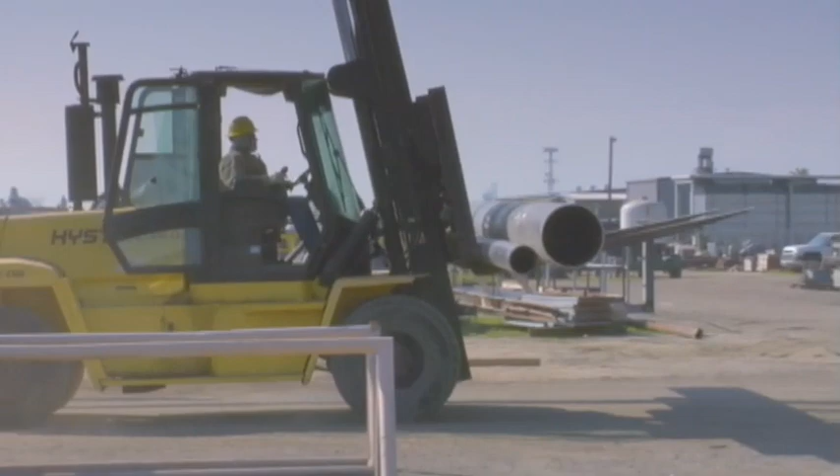This video is an overview of our safety expectations. We'll spend the next 30 minutes reviewing the critical safety issues that affect your work every day.

Let's start with the basics, your safety responsibilities. First, you must follow your company's safe work practices. Second, read the Contractor Safety Handbook provided by the producer. The handbook is your guide to safety expectations while working on our property. Keep it handy so that you can refer to it whenever you have questions.

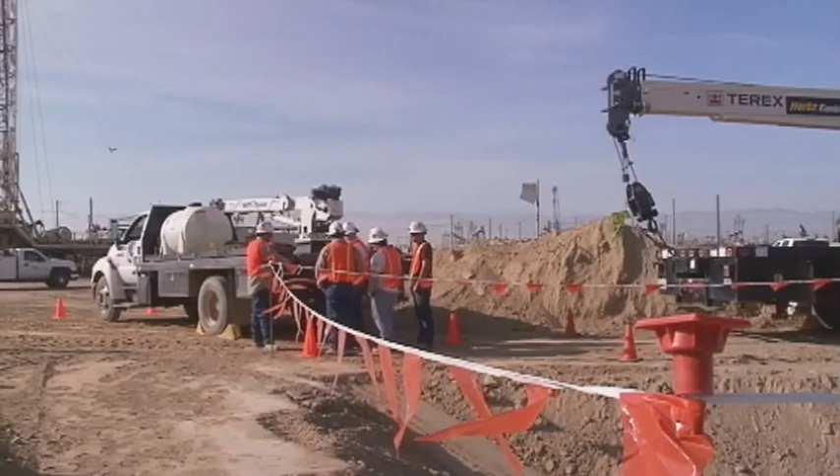We have developed this video to help you identify some of the hazards you might face on the job. Your company will give you details and training about the specific hazards at your job site. Hazard recognition and participating in safety tailgate meetings is important for you and your coworkers' safety.

Finally, some work areas will have additional requirements. Your company may have safety rules that are more strict than those of the oil producers. Check with your supervisor. You should recognize on-site safety rules cannot cover every possible situation. You still need to use your own good judgment.

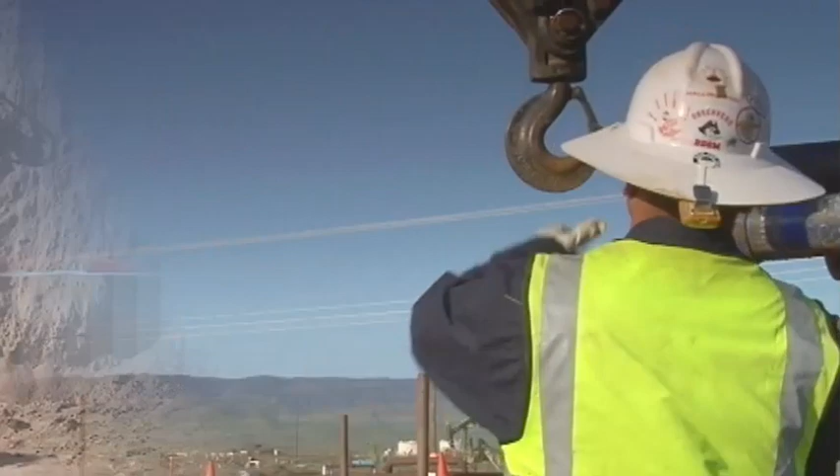As you begin your job, see that you wear proper clothing and the right personal protective equipment for your job. Stop any work that's not being done safely. You have the authority and the duty to stop unsafe work. Then correct the problem or safeguard the condition and report it to your supervisor.

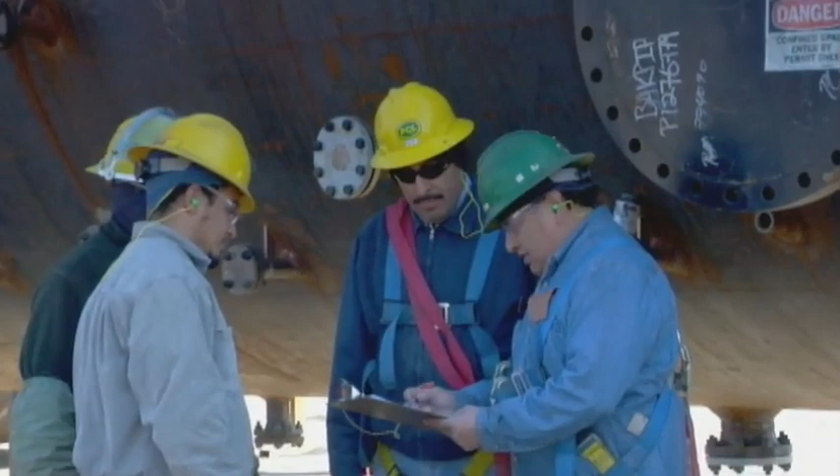All work must be planned. Your supervisor is responsible for planning work, but you must know and follow the plan. This planning includes emergencies and your responsibility to respond quickly in the event an incident or injury occurs.

Your company must provide you and your coworkers with a safety orientation and job-specific training. Your company must also provide the right tools and personal protective equipment in good working order. Supervisors must know and follow all safety policies. They must notify the producer of incidents immediately, investigate all accidents, and then submit a report to the producer.

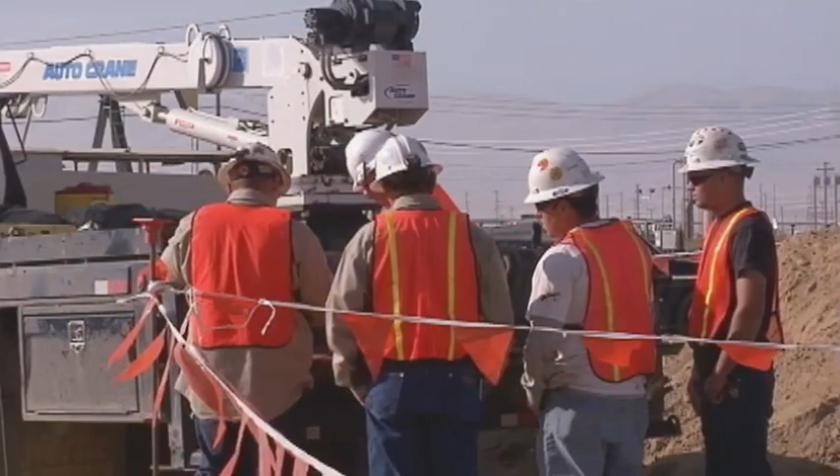Personal protective equipment, hydrogen sulfide, H2S, and respiratory protection. Now let's discuss the importance of personal protective equipment. Everyone who works at our locations must use basic personal protective equipment. We require everyone on the job site, including visitors, to wear an approved hard hat.

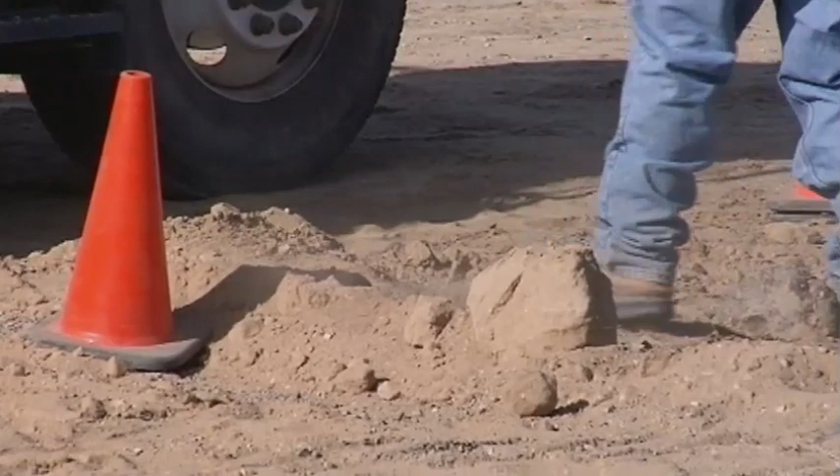Most producers require hard-toed safety footwear. Many producers require that everyone wear safety glasses with side shields or acceptable wraparound safety glasses. Some producers require snake chaps to be worn in certain situations. Gloves must be used when the job requires it.

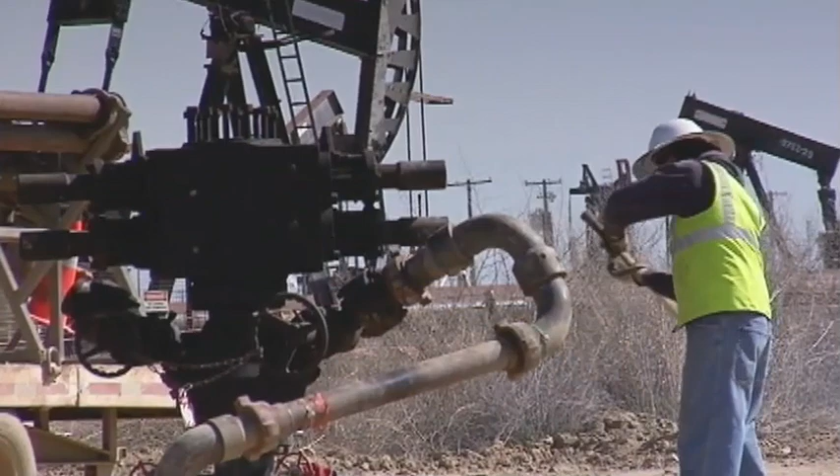You must wear proper work clothing, including long pants and a shirt with sleeves. Never wear loose or torn clothing or sleeveless shirts. Some producers do not allow hooded shirts or sweatshirts to be worn. Most producers require fire-resistant clothing, FRC, to be worn.

Consult with your supervisor with questions regarding this requirement. If your clothes get soaked with oil or any other substance that could catch fire or irritate your skin, change the clothes as soon as possible. Some producers may have prohibitions regarding wearing rings or other jewelry while working on their properties. Please check with the producer you are working for regarding specific prohibitions or requirements.

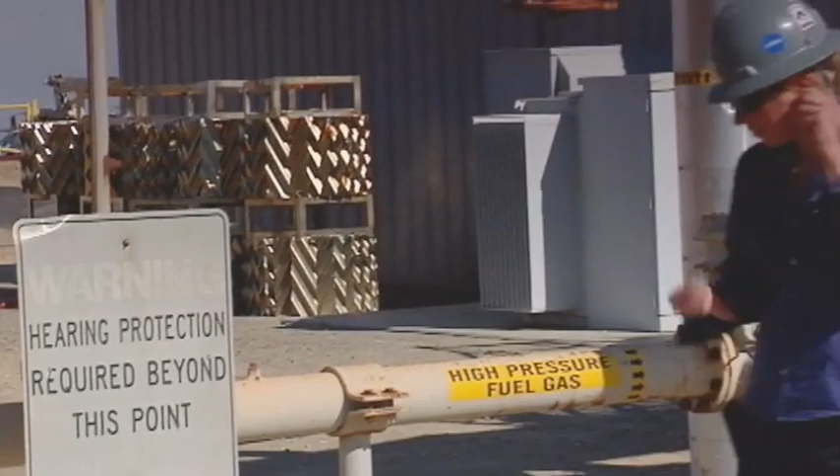Safety goggles and a plastic face shield must be worn when grinding, chipping, sawing, drilling, or hammering on metal. Chemical goggles must be worn anytime a splashing hazard exists. Approved hearing protection must be worn by all personnel working in or near posted areas or if the job task requires it. Different jobs require specific safety equipment.

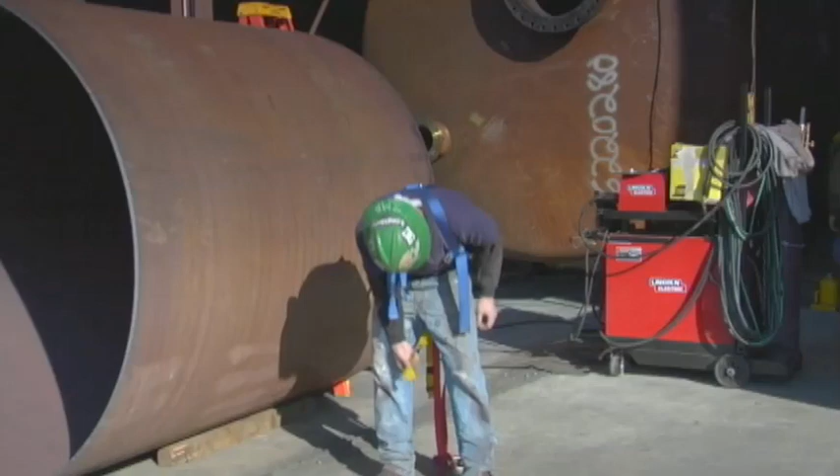For example, safety harnesses and lanyards must be worn by employees working at unprotected heights above the ground. Many locations produce crude oil and gas containing hydrogen sulfide, H2S, or sour gas. Hydrogen sulfide is poisonous and can be lethal in low concentrations.

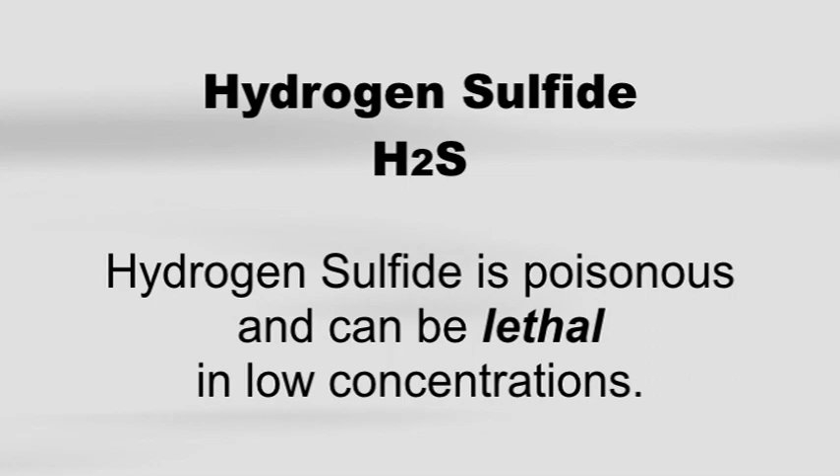All contract personnel working around production equipment, including well work and drilling operations that handle crude oil containing H2S, must be trained in H2S safety. Your company is responsible for providing you with appropriate respiratory protection and required training.

Many areas require the use of personal H2S monitors. You must be trained by your company in the operation of monitors. At a minimum, personal H2S monitors must alarm at 10 parts per million.

If your monitor alarms, move quickly crosswind, uphill, and away from the source. When working in a possible H2S environment, stay upwind of the potential source and plan a route of escape. Wind indicators are provided around equipment handling H2S and at rig locations.

Never attempt to rescue an H2S victim unless you have a backup person available and have donned SCBA. Communication is a critical part of any safety program.

Let's look at 3 important elements: the oil producer's safe work practices, the safe work permit, and energy control or lockout, tagout, blockout procedures. Safe work practices are a set of requirements that everyone must follow when working on our properties. A key section of safe work practices are the basic work rules.

Everyone must follow these rules at all times. Let's review these basic rules. Always act with safety in mind, both your own and your coworkers. Plan each job properly. Identify and address known hazards. Do not start the work unless you can do it safely. Stop or pause any unsafe job or operation.

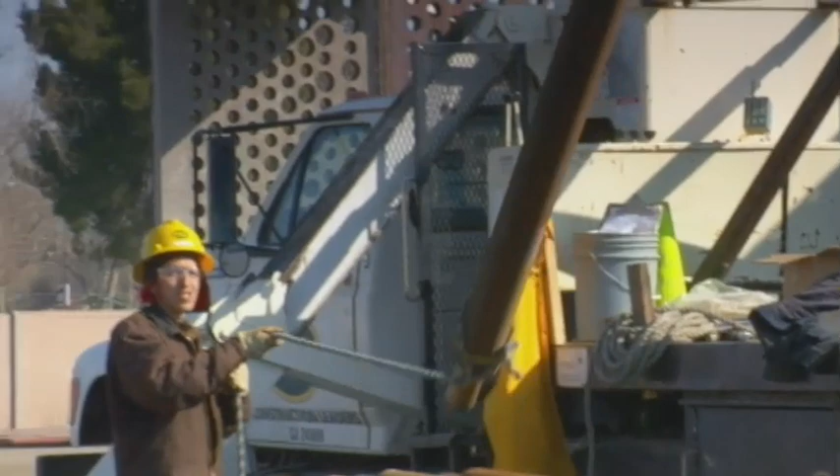Some areas in California can experience high daytime temperatures during work hours. Under these conditions, heat stress can be a serious danger and cause long-term illness or death. While working in these conditions, ensure that you and those around you drink plenty of water. Use good judgment during tasks that require strong physical exertion. If you feel too hot or experience dizziness or other symptoms, rest in the shade and carefully monitor your symptoms.

Seek medical help immediately if signs of heat exhaustion are manifest, such as hot, dry skin, profuse sweating, confusion or dizziness, nausea, or shallow breathing.

Do not work unless you are fit for duty. Do not work unless you are properly trained for the job. Do not take part in fighting, scuffling, horseplay, or any other activity that could injure someone. Comply with all posted warning signs. Wear required protective equipment. Use and maintain tools and equipment safely.

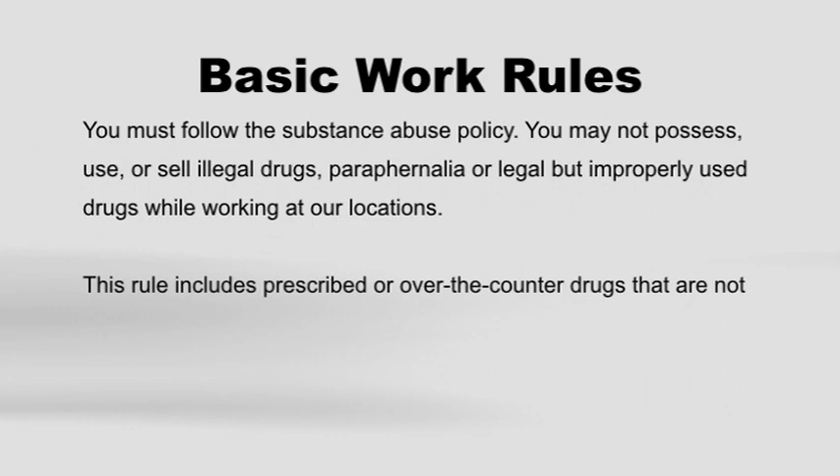Operate vehicles safely. You must follow the substance abuse policy. You may not possess, use, or sell illegal drugs, paraphernalia, or legal but improperly used drugs while working at our locations. This rule includes prescribed or over-the-counter drugs that are not used for the intended purpose.

Do not report or return to work when impaired by alcohol. You may not possess or use alcoholic beverages on our properties. You may not carry or use firearms, weapons, fireworks, explosives, live ammunition, or devices that will start fires. Do not remove, damage, or interfere with any safety device or warning sign. Smoke only in designated areas.

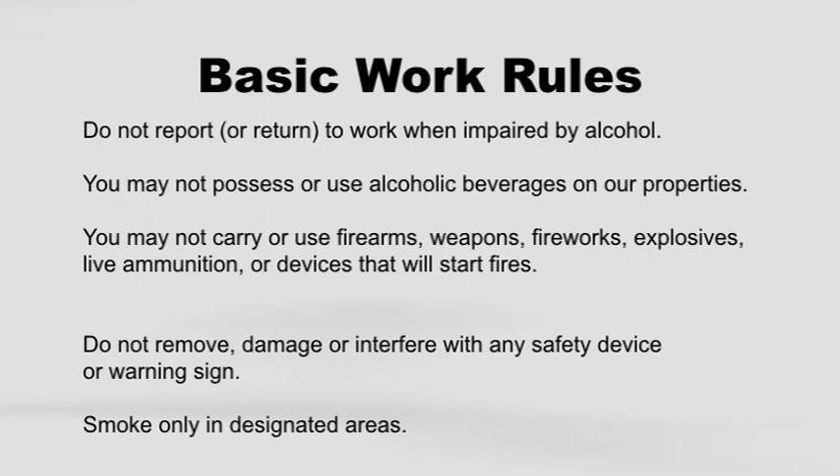Report all safety incidents to your supervisor right away. This includes personal injuries, equipment damage, and spills. Do not steal, damage, destroy, or remove any property belonging to the oil producers or its employees, contractors, or visitors. Make sure you have a means to call for help when working in isolated areas.

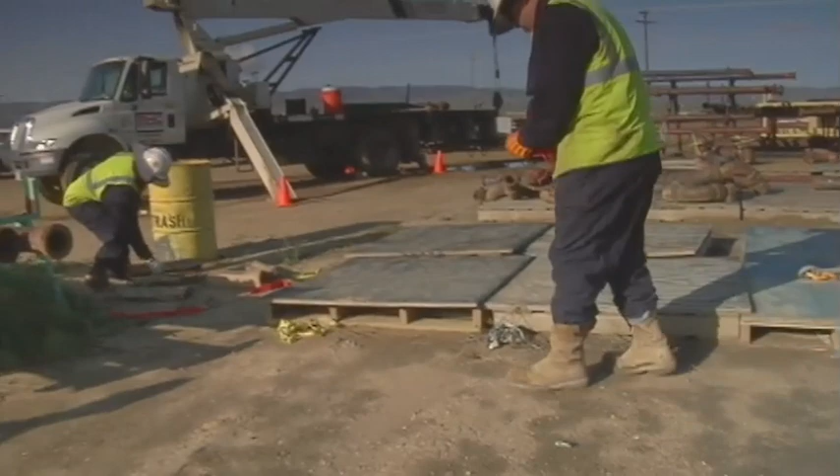Housekeeping rules are an important part of safe work practices. Always keep your work area clean and orderly. Make sure emergency exits are clear. Clean up mud, oil, grease, and litter right away. And make sure to collect trash and debris at least once a day.

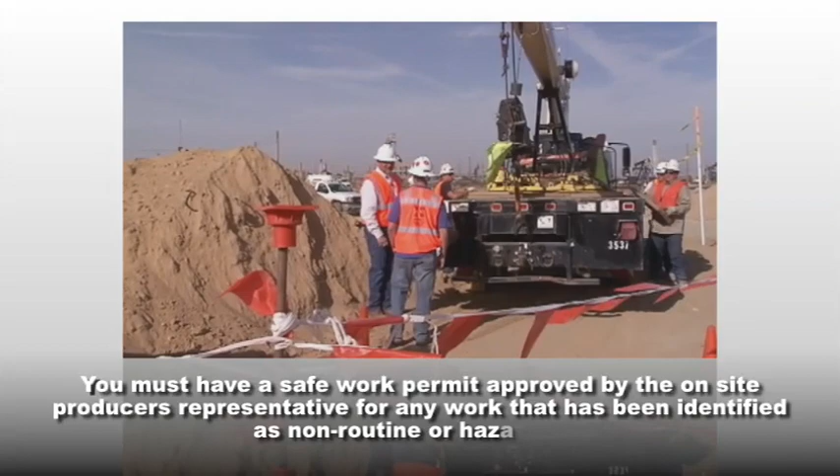You must have a safe work permit approved by the on-site producer's representative for any work that has been identified as non-routine or hazardous. Your supervisor will ask everyone involved to review the permit and then post it at the job site. Make sure you understand all the permit requirements before starting the job. Stop work if conditions change, a new hazard occurs, or an oil producer representative asks you to stop.

Now, let's review some critical hazardous exposures that can be encountered while working on the oil producer's property. Hazardous stored energy. Energy control is required whenever you are performing tasks which involve equipment, machines, piping, or vessels which could potentially injure you due to a release of stored energy. Energy sources must be identified and isolated to a zero energy state before service and maintenance can be performed.

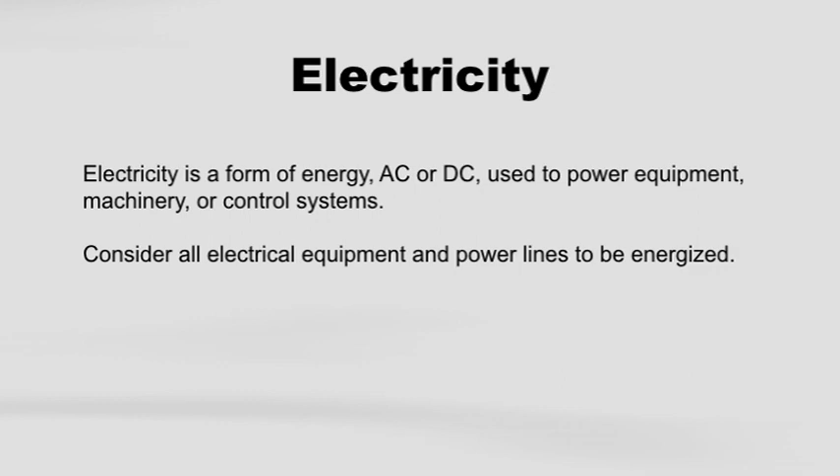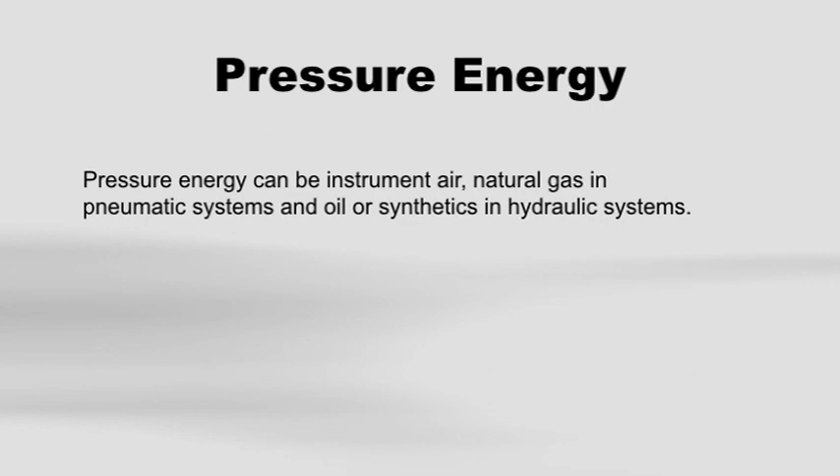Electricity is a form of energy, AC or DC, used to power equipment, machinery, or control systems. Consider all electrical equipment and power lines to be energized. Pressure energy can be instrument air, natural gas in pneumatic systems, and oil or synthetics in hydraulic systems.

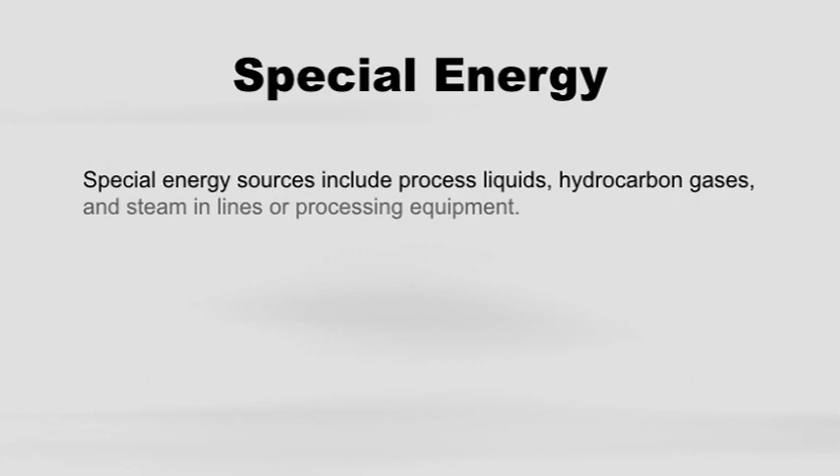Momentum gravity energy is the force in moving equipment components caused by gravity or inertia. It is critical to identify momentum energy after the power source has been shut off. Residual energy can occur after the power source has been shut off or disconnected. Special energy sources include process liquids, hydrocarbon gases, and steam in lines or processing equipment.

Methods of energy isolation. The following are ways to isolate energy sources. Positive physical isolation. Remove spool, air gapping. Blind flanges, slip blinds, double block and bleed, and lockout of energy source.

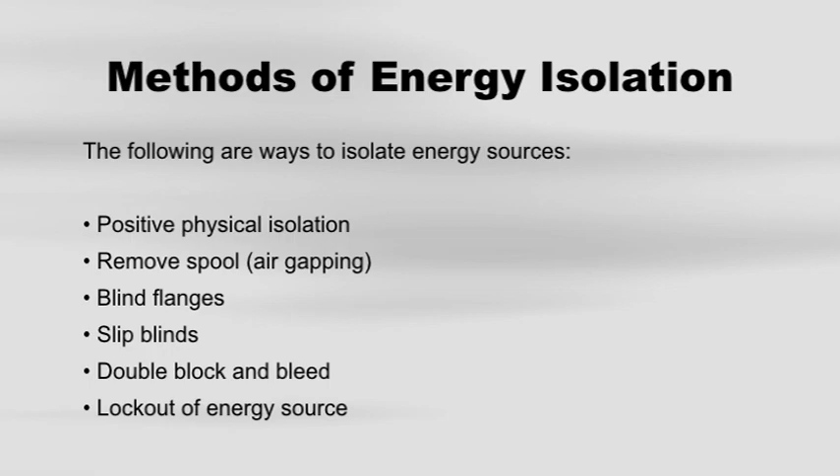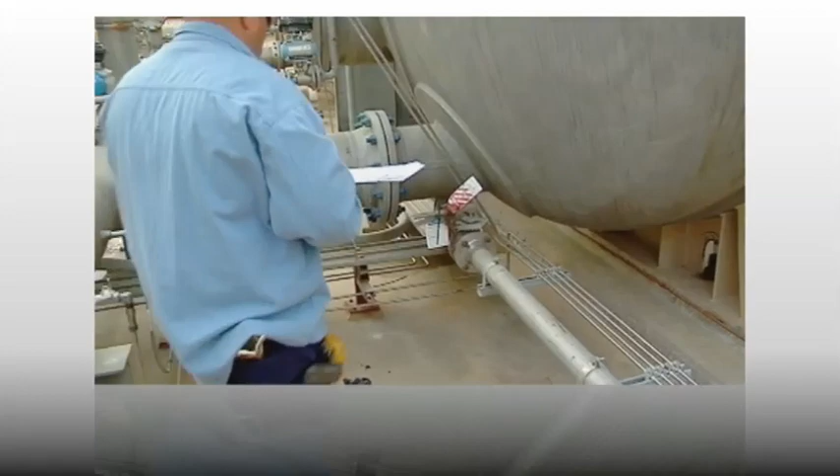Locks must be used with tags to isolate energy sources. Tags should indicate the person responsible for the lockout, the reason for the lockout, the job being performed, and the date. Each producer has developed equipment lockout, tagout, blockout procedures.

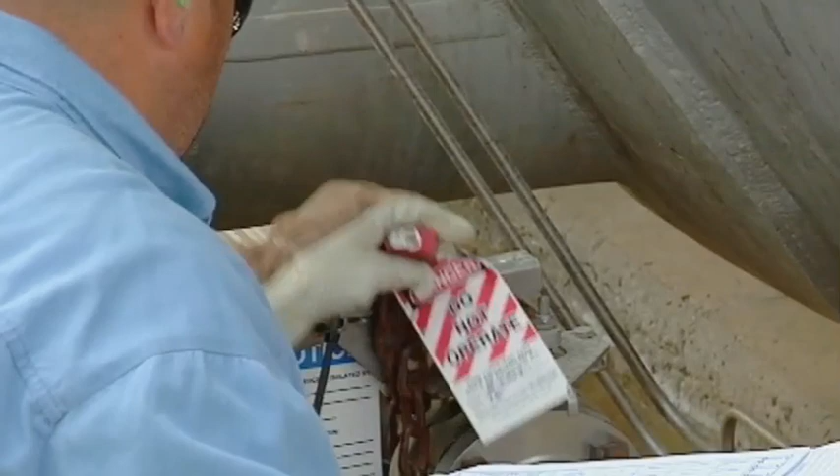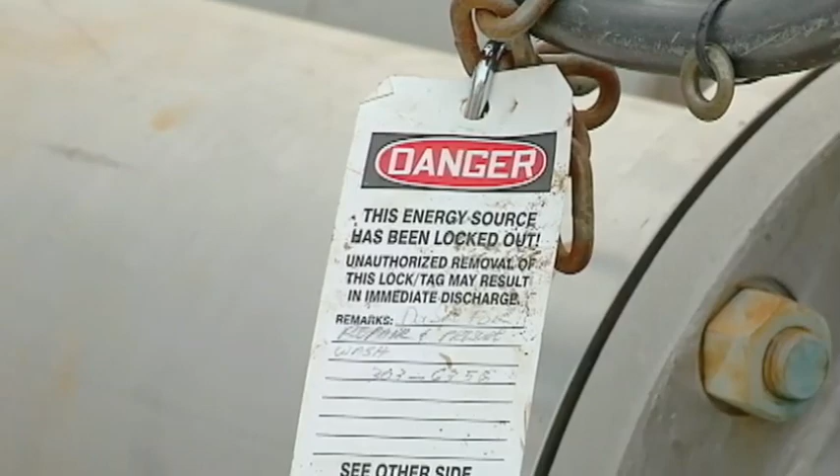Contractors must understand these requirements and assess how their own procedures will work in conjunction with the producers. Never shut down or start up equipment or open or close valves until you notify the producer's representative or have been directed to do so by the producer's representative.

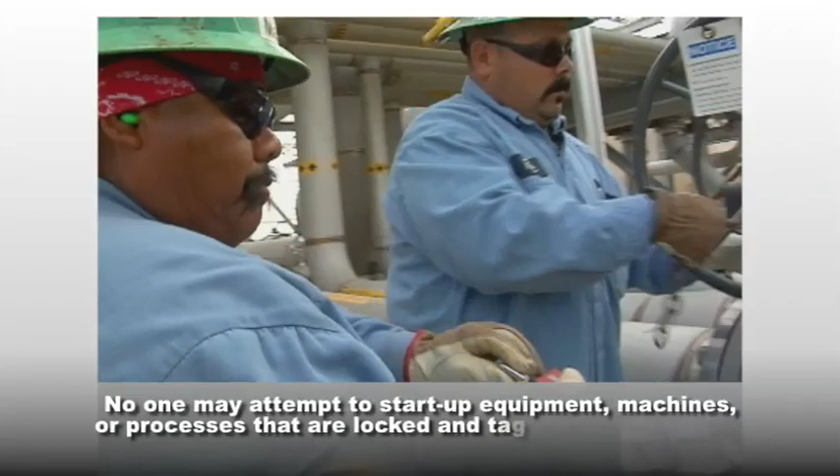Group locks can be used to isolate equipment for a group of workers. Lockout must provide the same level of protection as utilizing individual locks. No one may attempt to start up equipment, machines, or processes that are locked and tagged out of service. Specific procedures must be followed to restart, re-energize, or activate equipment or systems that have been isolated.

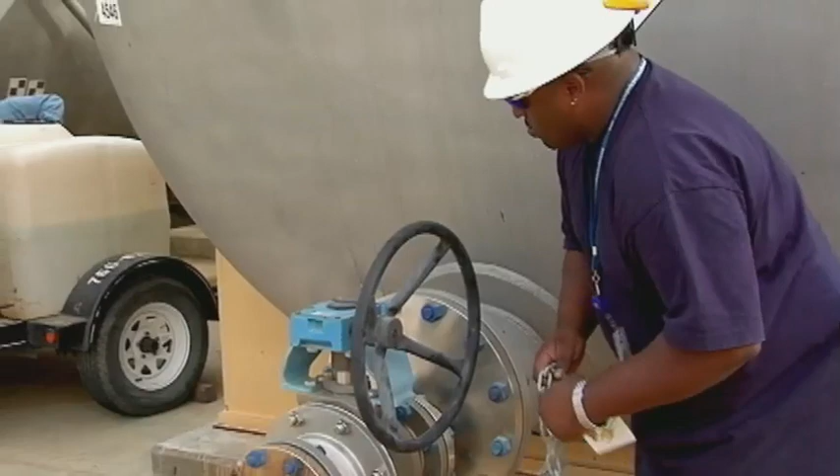The basic requirements which must be followed before isolation devices can be removed and equipment can be energized are: First, notify affected employees that the isolation devices are being removed. Second, check to ensure that all personnel are clear of the equipment or system to be re-energized. Third, locks used to isolate equipment can only be removed by the person who originally applied the lock.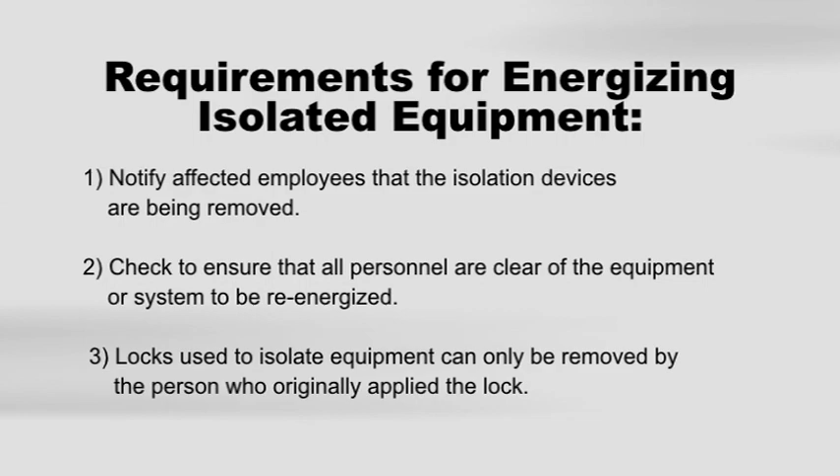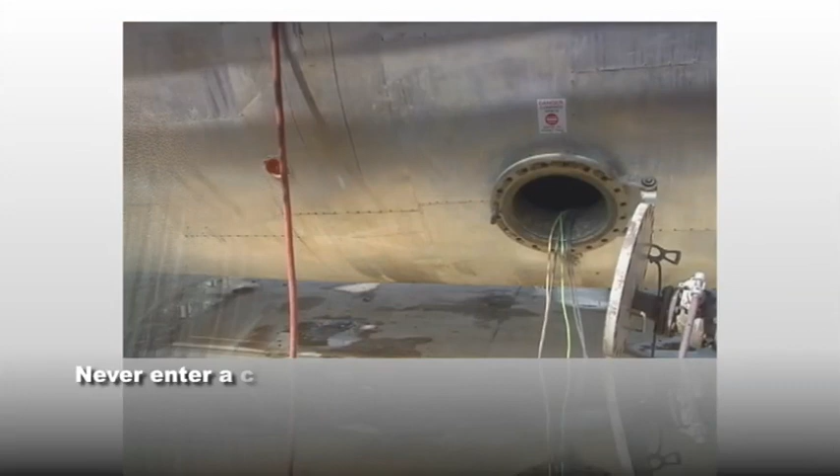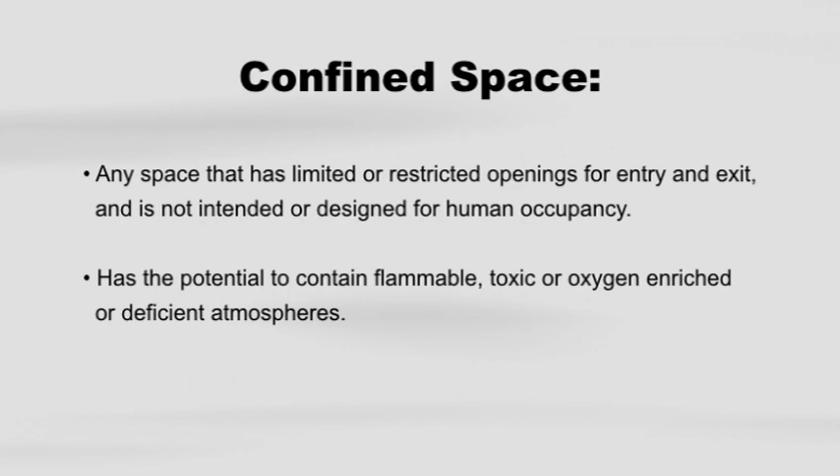Confined spaces. Confined space entry permits are required any time confined spaces are entered. Never enter a confined space unless you have received the appropriate training, have the right equipment, and have been tasked with work in that area. A confined space is any space that has limited or restricted openings for entry and exit and is not intended or designed for human occupancy, has the potential to contain flammable, toxic, or oxygen-enriched or deficient atmospheres, or contains any other recognized serious safety or health hazard.

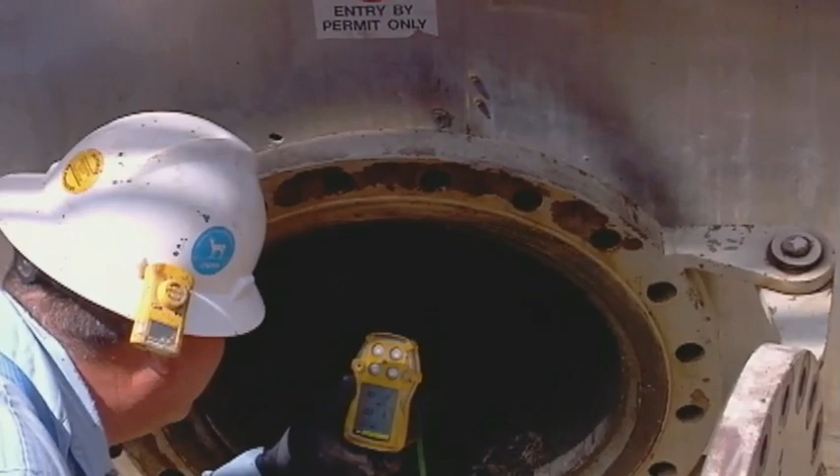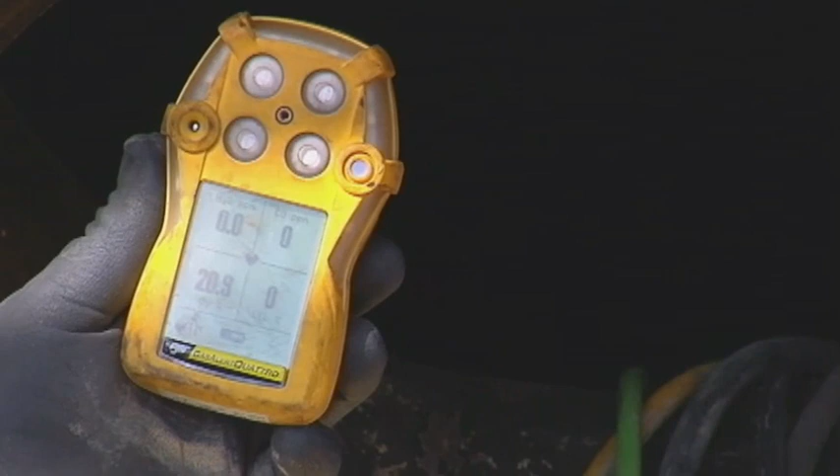A trained attendant or standby person must be assigned to a confined space entry at all times. Forced air ventilation equipment, appropriate lighting, rescue equipment, and continuous atmospheric monitoring may also be required depending on the nature of the hazard. Safe equipment operation is another important part of injury prevention.

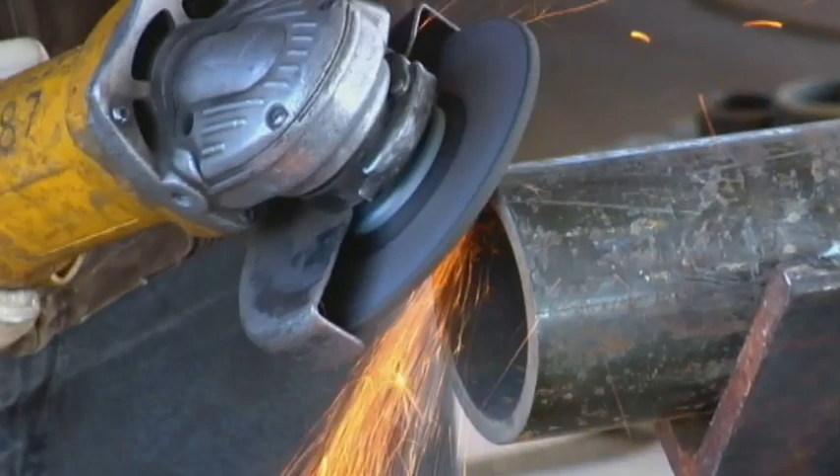Only designated and qualified people may operate power tools, equipment, or shut down equipment.

Safe vehicle driving. You must have a valid driver's license to drive on our property. Practice defensive driving, obey posted speed limits, drive only on the prepared roads, wear seat belts at all times, use pull-through parking whenever possible to avoid unnecessary backing.

If you must back up heavy equipment, have a spotter signal you. Some equipment requires backup alarms. Some producers require that you never leave your vehicle unattended while it's running.

At these locations, stop the motor and set the parking brake and put the transmission in low gear. Chock your wheels if you think there's a possibility the vehicle might roll.

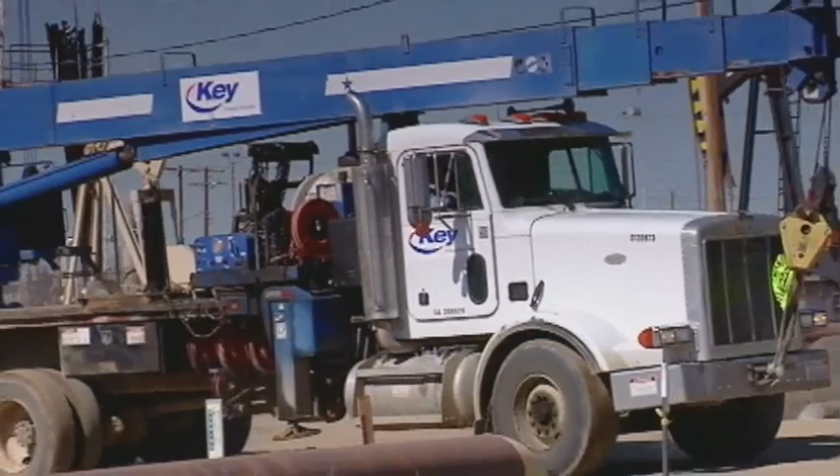Some oil producers may have special driving procedures or rules in their areas, such as specific speed limits and prohibitions regarding cell phone use while driving. Be sure to check with your supervisor at your work location for any special requirements.

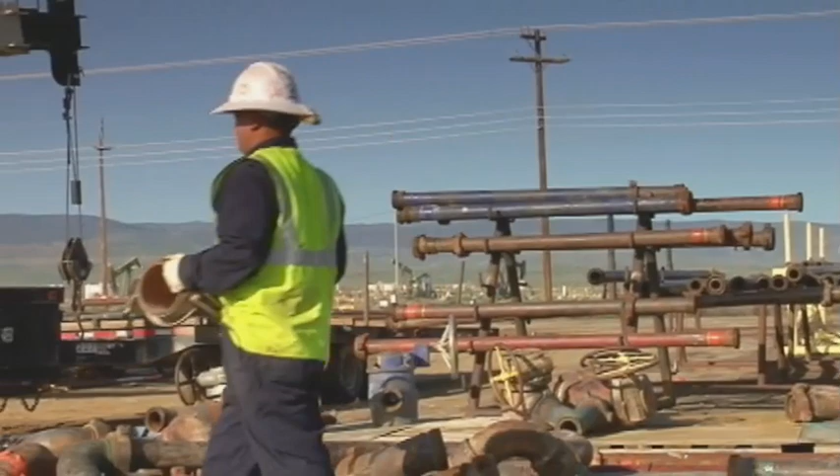Ergonomics. Always use safe lifting techniques. Improper lifting is the most common cause of back injuries. Face the load you're about to lift. Bend your knees and hold the object close to your body. Keep your back straight. Use your legs, not your back, to lift the load. You should never try to lift more than 50 pounds by yourself.

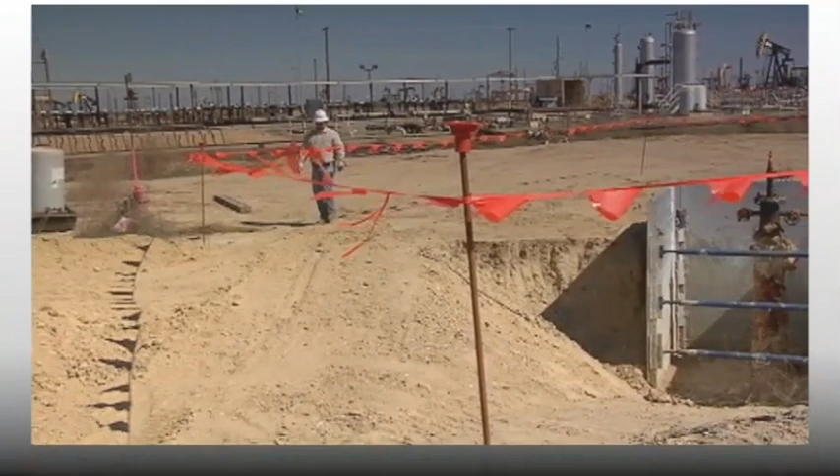Excavation and trenching. Unless otherwise determined by a competent person, all soil at our locations is considered to be Class C sandy or loose soil. A competent person is required to be on site. For our operations, the Cal OSHA regulation for excavation or trenches deeper than 5 feet shall be followed when personnel are required to enter. Proper protective measures shall be taken, such as sloping, shielding, or shoring. Barricades are always to be installed for any open excavation or trench.

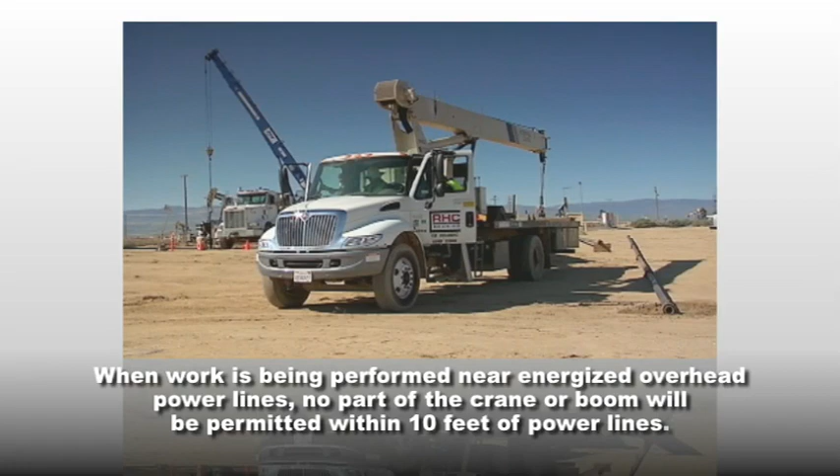Cranes and rigging. All cranes must be operated by qualified operators. A qualified signal person must also be on duty. All power lines should be considered energized unless proper measures have been taken for de-energizing. When work is being performed near energized overhead power lines, no part of the crane or boom will be permitted within 10 feet of power lines. Consult with your producer representative for specific power line clearance requirements in your location.

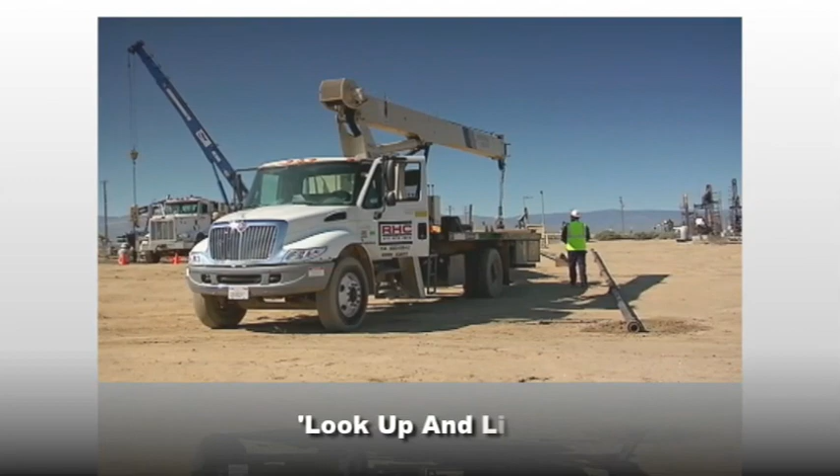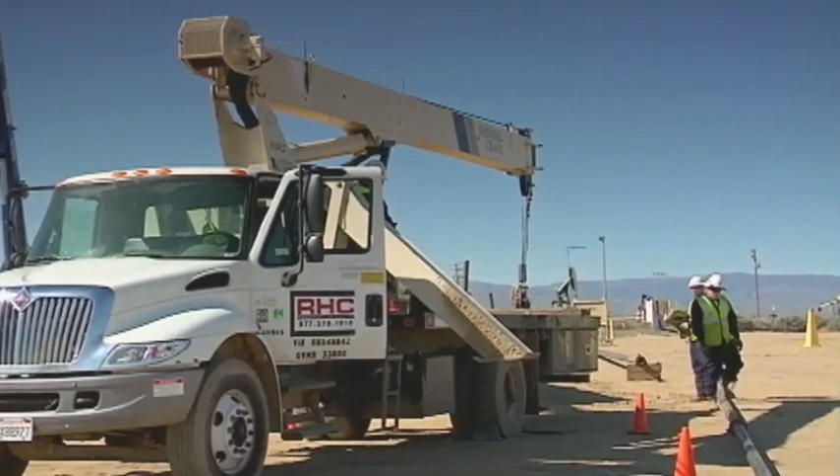Most California oil producers recommend the use of the Look Up and Live flag procedure for crane operations at their sites. This procedure is designed to keep the crane operator from overlooking or forgetting major steps in the operation of his or her crane. The crane operator shall remove the flag from the load line or lifting hook and look up for power lines while walking around the crane. The operator then attaches the flag to the top of the steering wheel of the vehicle.

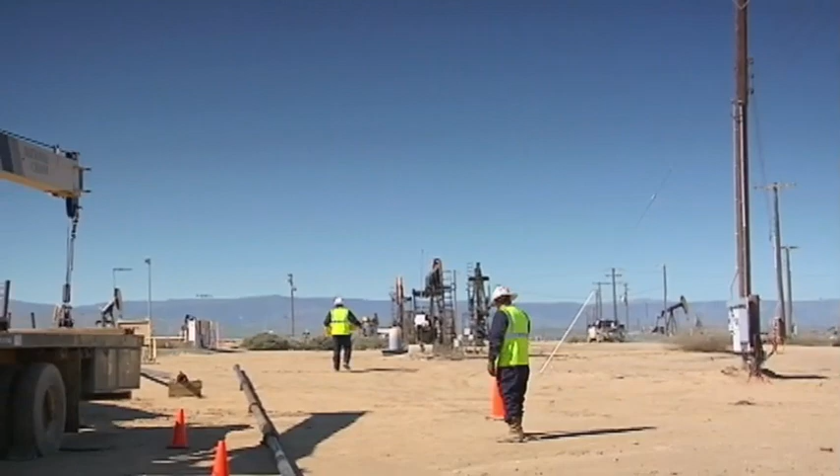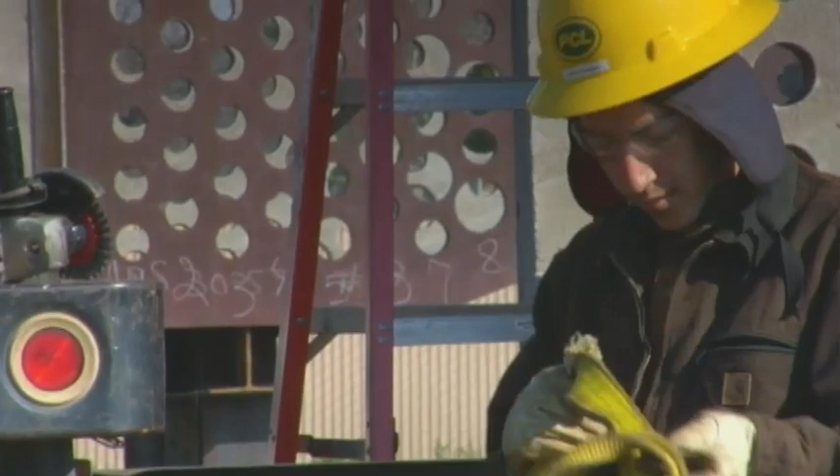If power lines are on location, they must be identified by placing cones 10 feet out below the lines. When crane operations are complete, and before any driving begins, the crane operator shall remove the flag from the steering wheel and clip it to the load line. Rigging methods depend largely upon the job to be done. It is important to check all phases of the job and all possibilities of job deviation, which may affect the rigging components.

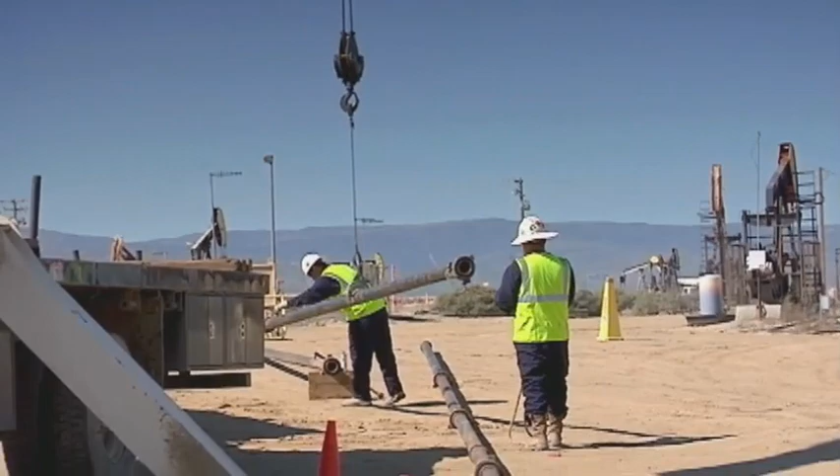Loads should be controlled by use of a tag line or snub line. Never walk or work under a suspended load.

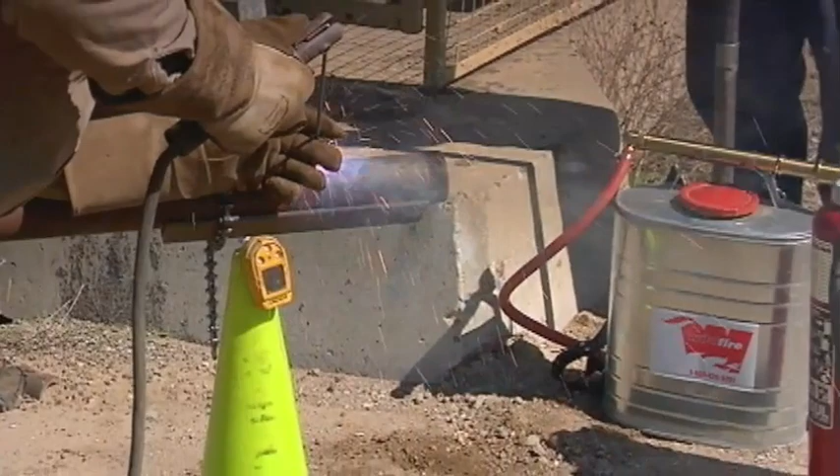Safe welding. Welding operations include a high risk of fires and injuries. Be on the lookout for conditions that could lead to a fire and take fire prevention measures. Always keep a fire extinguisher on hand. Be sure to use guards on grinders and wire wheels.

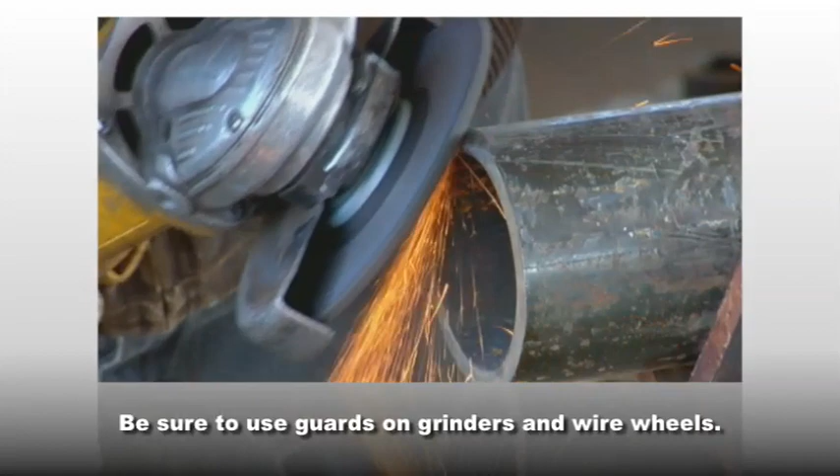Fire prevention is a serious concern in every job. Never smoke or use open lights around crude or petroleum tanks. Before welding, cutting, or grinding in a grassy area, remove any material that might burn.

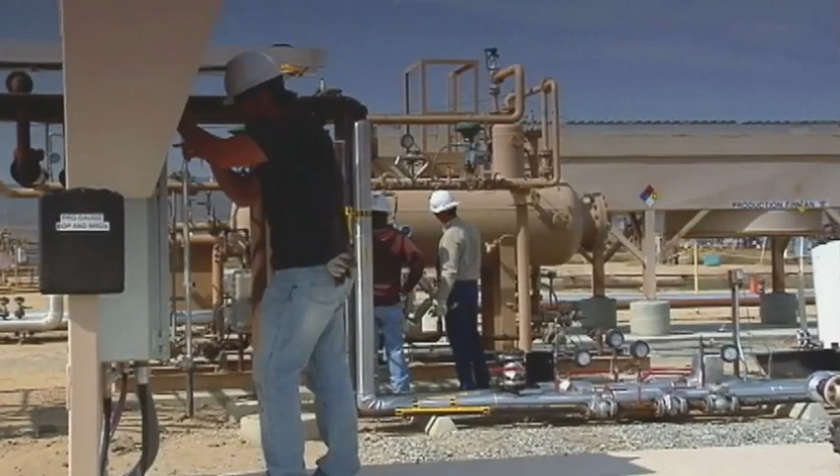Every location has its own emergency action plan. You must know your location's plan and be able to take quick action if an emergency occurs. When an emergency occurs, immediately shut down work in a safe manner and report to the designated evacuation area.

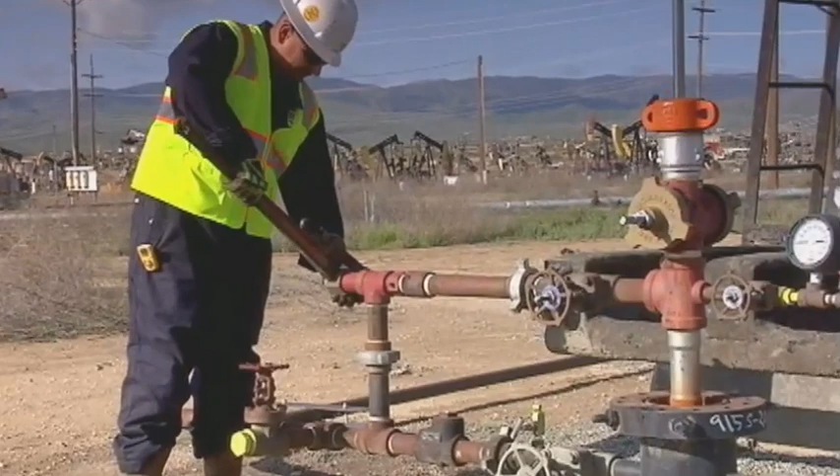General environmental rules. Air emissions. California oil producers are committed to protecting the environment. We ask that you make every effort to help us meet this goal. We are required to maintain leak-free facilities to comply with our air permits. We ask your help to ensure that all fittings are made up tight and that all sources of gas leaks are plugged off.

Spill reporting. You are required to immediately report any spill or release of materials, including crude oil and/or condensate, to a producer representative. Stream channel protection. Disturbance to navigable waterways, stream channels, or any other watercourse with habitat that may support endangered species in its bed or banks must be approved by the producer. Disturbance to stream channels requires permitting prior to commencing any work on the stream bed or bank.

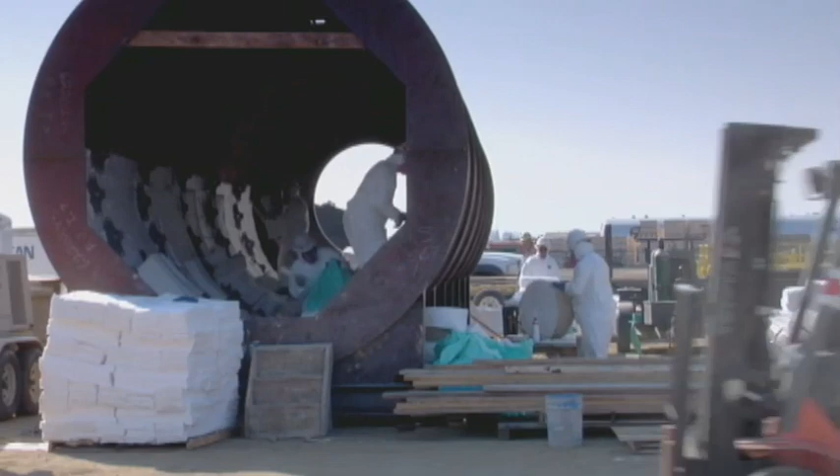Waste disposal. Any job is not complete until all waste and trash are removed from the job site and disposed of properly. The contractor is responsible for the disposal of all trash and waste generated by their activities. The disposal method must be approved by the producer. If you have any questions about hazardous waste, please contact your supervisor or oil producer representative.

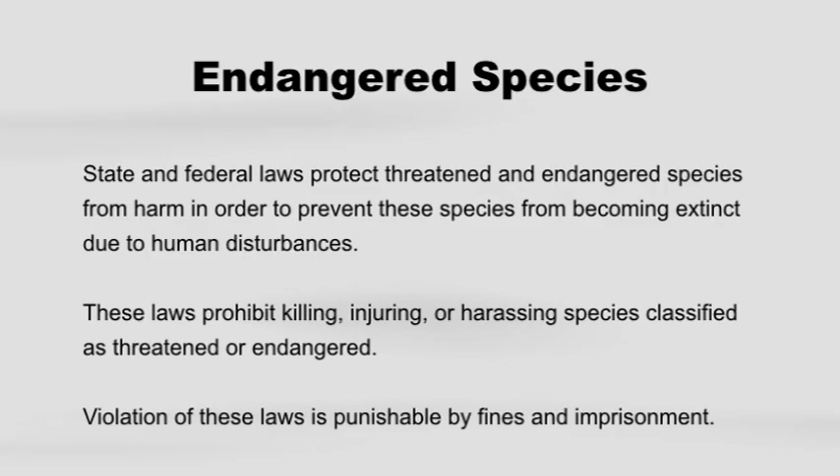Endangered species. State and federal laws protect threatened and endangered species from harm in order to prevent these species from becoming extinct due to human disturbances. These laws prohibit killing, injuring, or harassing species classified as threatened or endangered. Violation of these laws is punishable by fines and imprisonment. Endangered species are known to exist in most California oil fields. Contact an oil producer representative at your work location for a list of endangered species present at that location.

Now let's take a look at work areas where you may face certain specific hazards. Keep in mind that this video is a general overview of some of the common hazards. Your company will give you details and training about specific hazards at your job site. Your Contractor Safety Handbook includes a more complete list of hazards you may face while working at our locations. In the following segment, we will review possible hazards in major areas, including site-specific general hazards, hazards associated with wells, and hazards at and around our facilities and equipment.

Let's start with general hazards. Our fields contain a vast network of above-ground and underground lines and pipes, which carry a variety of potentially hazardous fluids. You must always be aware of these lines and watch out for them while working. For example, be careful not to drive over an exposed pipeline.

Above-ground lines include hydrocarbon pipelines, steam lines, fresh and produced water lines. And remember, these lines may be very hot. You could get a severe burn by touching a line. Many hydrocarbon lines contain products that may include hydrogen sulfide, commonly called H2S. As we mentioned earlier, H2S is a poisonous gas that's heavier than air.

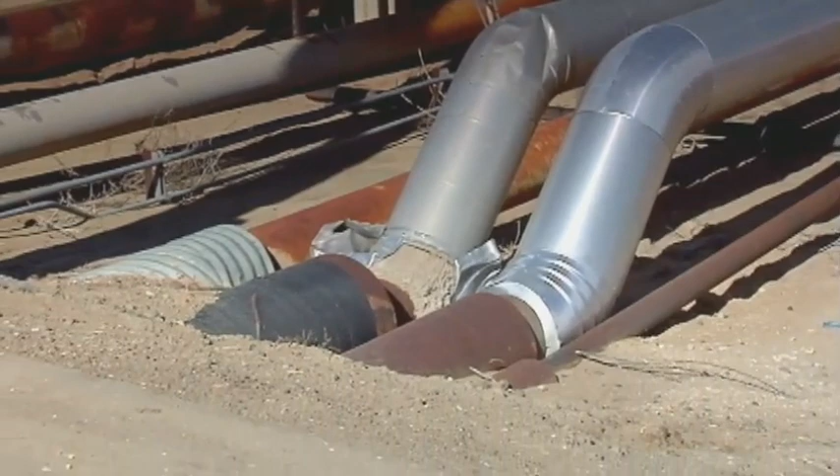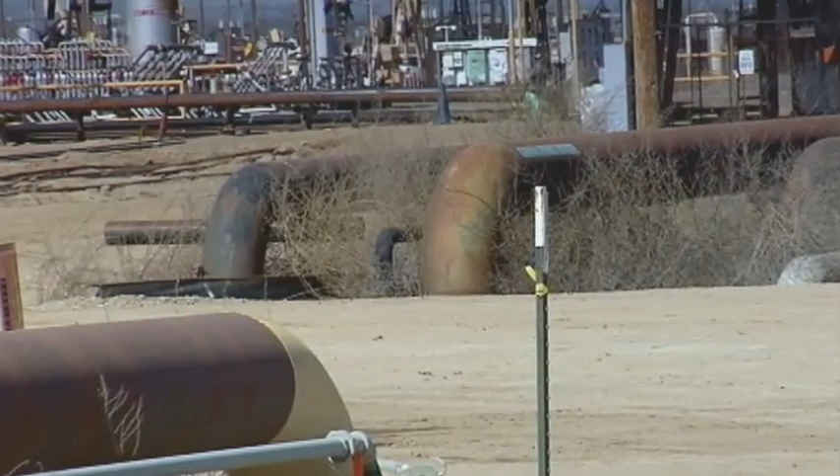Underground lines, although we cannot see them, may be more hazardous than above-ground lines. Be extremely careful when doing any excavation work. We can provide maps that show the type and location of underground lines. Always talk to your supervisor and the producer representative before digging. Most oil fields have subsurface valve boxes. Valve boxes are low spots where H2S and other harmful vapors may accumulate, and a valve box is a confined space.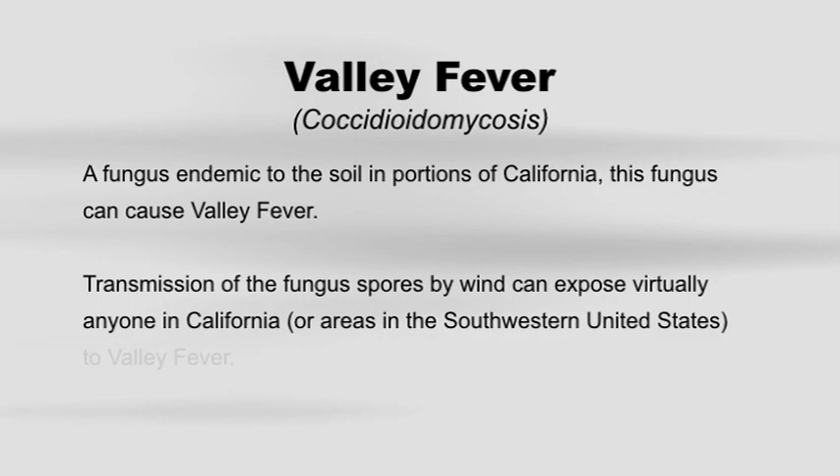Valley fever is a fungus endemic to the soil in portions of California. This fungus can cause valley fever. Transmission of the fungus spores by wind can expose virtually anyone in California or areas in the southwestern United States to valley fever. Workers who perform tasks that disturb the soil may be at a higher risk. In some cases, valley fever can result in serious illness or even death.

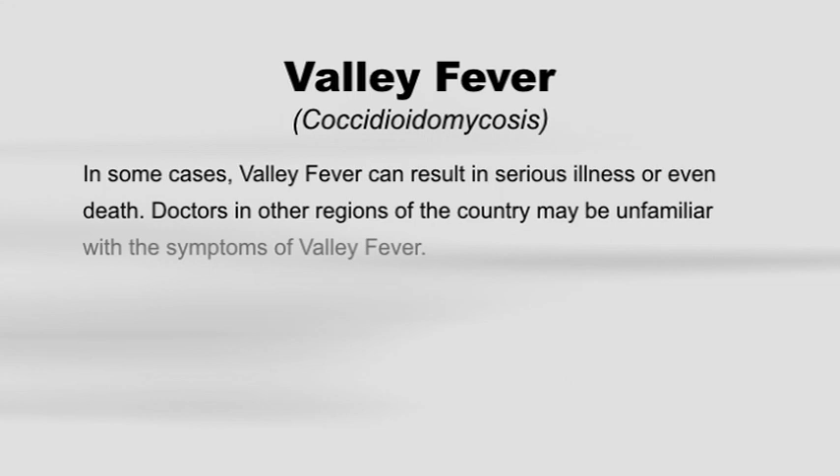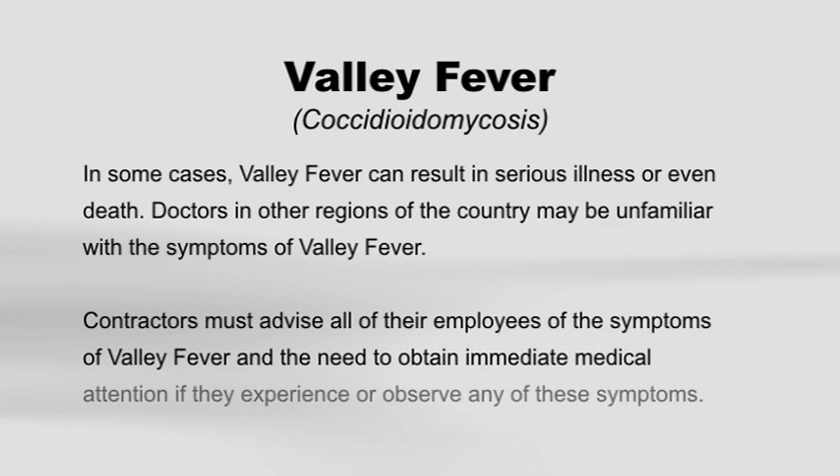Doctors in other regions of the country may be unfamiliar with the symptoms of valley fever. Contractors must advise all of their employees of the symptoms of valley fever and the need to obtain immediate medical attention if they experience or observe any of these symptoms.

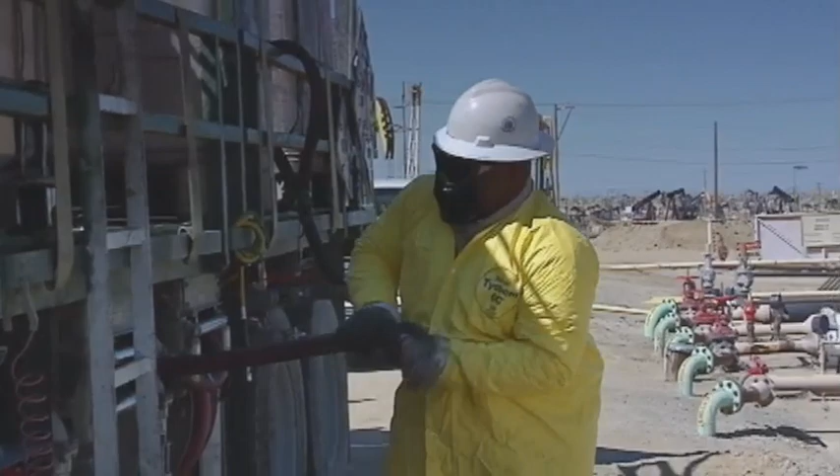Chemicals are another general hazard you may encounter anywhere in the oil field. Many of them can be harmful. Always read the material safety data sheet before working with any chemical. Follow the precautions carefully and wear the appropriate personal protective equipment.

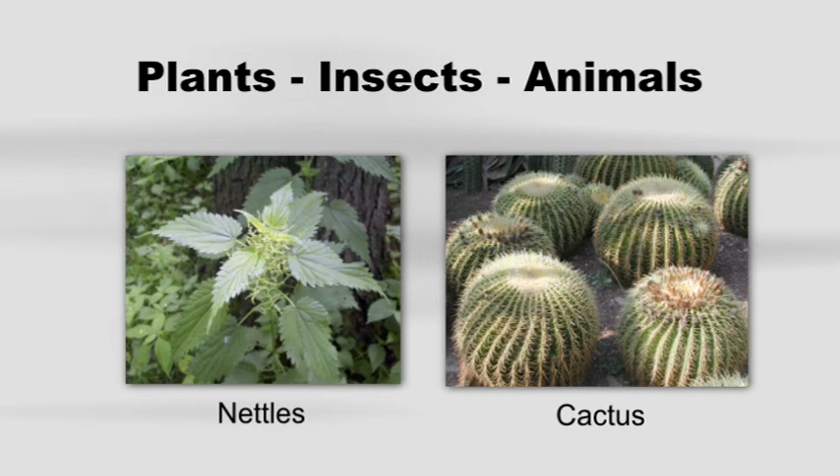The last category of general hazards includes plants, insects, and animals. You may find poison oak at some work sites. Learn to recognize this plant and stay away from it. Plants such as cactus and stinging nettles can cause painful injuries. Always be careful when working around plants with thorns.

Bees, spiders, and other stinging insects are common everywhere in the oil field. Watch out for insects when working in areas where they live. Snakes, including poisonous snakes, live in many of our areas. Watch where you walk and look around before reaching, especially in areas where snakes may hide.

The second group of common hazards is associated with wells. Our oil fields contain several types of wells, ranging from producing wells to injection wells. Each type has its own hazards. The most common wells are heavy oil producers used in thermally enhanced production.

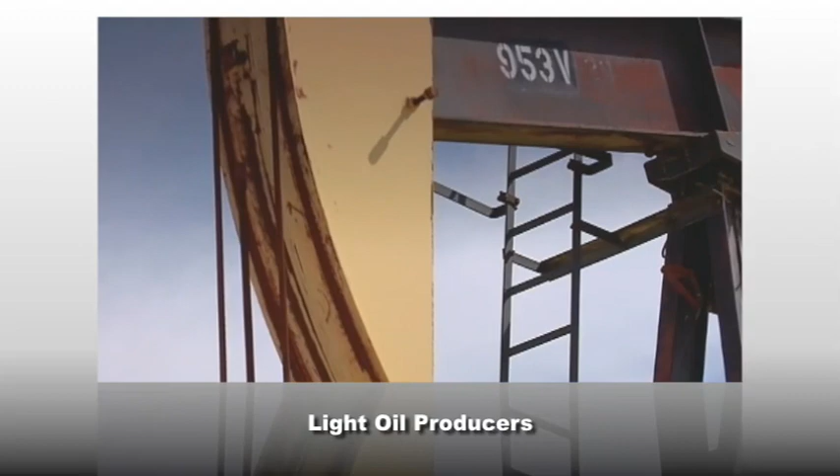Fluids from these wells may be very hot and may contain H2S and other flammable gases. Other wells produce lighter crude. These wells present a special fire hazard because the oil they produce has a lower flash point than heavy oils.

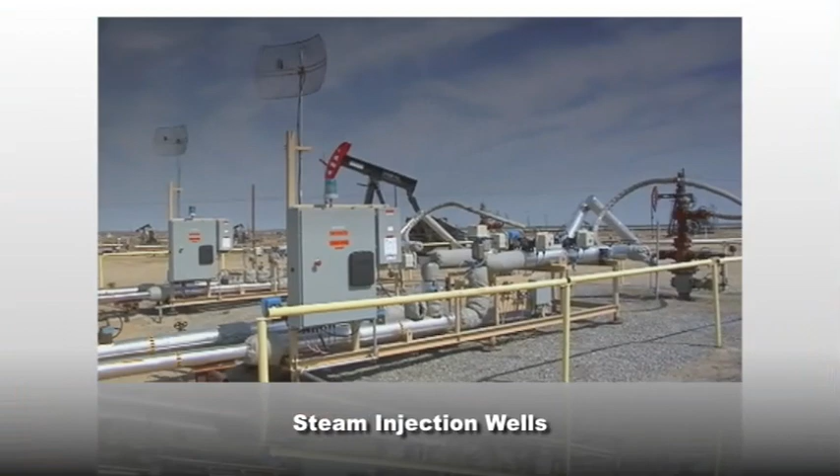Steam injection wells pose high temperature and pressure hazards. They also contain large volumes of hot steam and possibly H2S. Also, be aware of high pressure and possible high temperature hazards when working around water flood injectors.

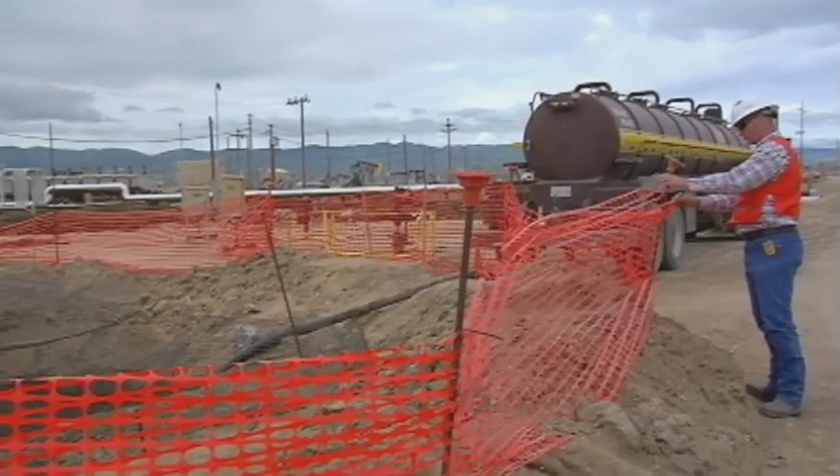Drilling sumps or reserve pits at drilling or workover locations have flags or fencing marking the boundaries. Be very careful when driving near active drilling or workover operations.

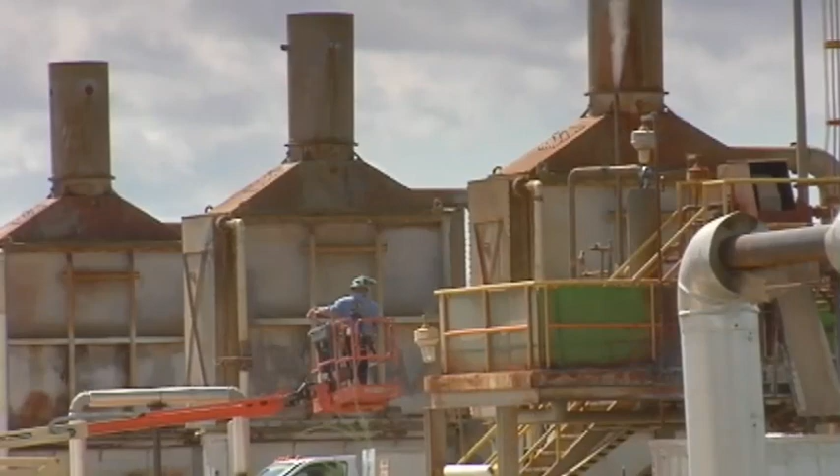Our third group of hazards occurs in and around facilities. Steam generators are essential to produce California's heavy crude, but these generators involve a number of potential hazards. Never go into a generator site unless your job specifically requires it. The most obvious hazards are the very high temperatures and pressures needed to generate steam.

High noise levels are another possible hazard. Always wear hearing protection when working around steam generators. Steam generator sites may contain hazardous chemicals, such as the caustic used in the scrubbers.

Drilling and well servicing crews must pay close attention to the wind direction when working near a generator. Never work in the path of a flue gas scrubber plume. These plumes may contain small amounts of caustic vapor and sulfur dioxide. Both can be irritating if you breathe them or get them on your skin or in your eyes.

Casing vapor recovery units, or CVRs, collect the casing gases from nearby wells. CVRs are a possible source of H2S and other flammable gases.

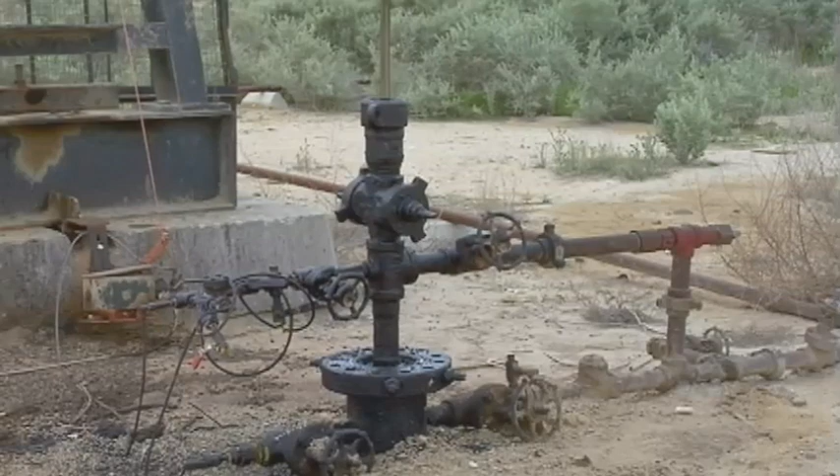Test stations are accumulation points for the flow lines from producing wells. Never operate any valve at these sites without prior specific instructions. Closing a flow line inlet valve while a pumping unit is operating can cause packing failure or line rupture.

Gas plants and cogeneration plants, like other major facilities, are often fenced. These plants are limited access areas. All workers must check in, and only those with required jobs and proper training will be allowed inside.

Tanks are another potential hazard in our operations. Empty tanks pose a risk of fire or explosion, since they often contain oil and flammable vapors. An empty tank is a confined space when going inside. Never walk on top of a tank without obtaining the producer's approval and taking necessary precautions.

Radiation is a possible hazard in some areas. We sometimes use radioactive materials for drilling, well servicing, and X-raying pipe. Be alert for radiation warning signs and don't go inside a posted area.

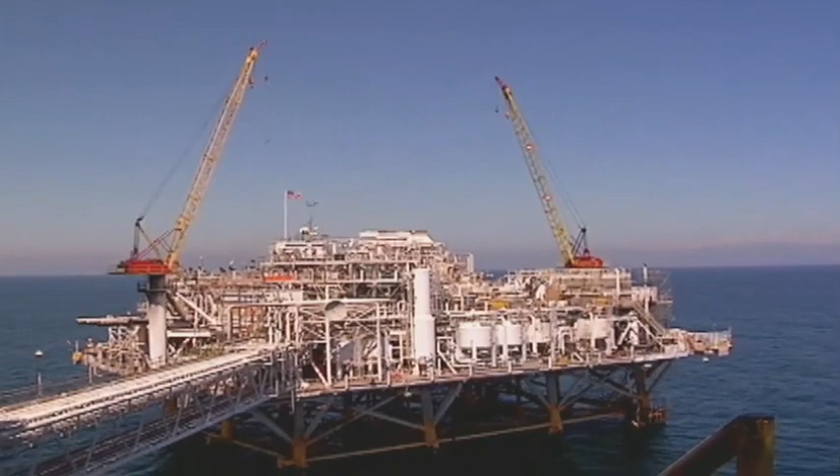Drilling, construction, blasting, well servicing, and well workover operations all present different hazards. Never go into a specialized work area unless your job requires you to be there. For those of you who may work in the offshore environment, you will receive a thorough orientation about the hazards you can encounter there, prior to and upon arrival at the offshore platform.

Now that you've seen the areas where you may encounter hazards, you're ready to learn more about these potential hazards and how to protect yourself. Your company will provide this specific training.

Stay alert for possible hazards and use the appropriate personal protective equipment. Be sure to ask questions if you don't understand the hazards of a job. If you're not sure how to do a job safely, don't do it. See your supervisor for more instructions.

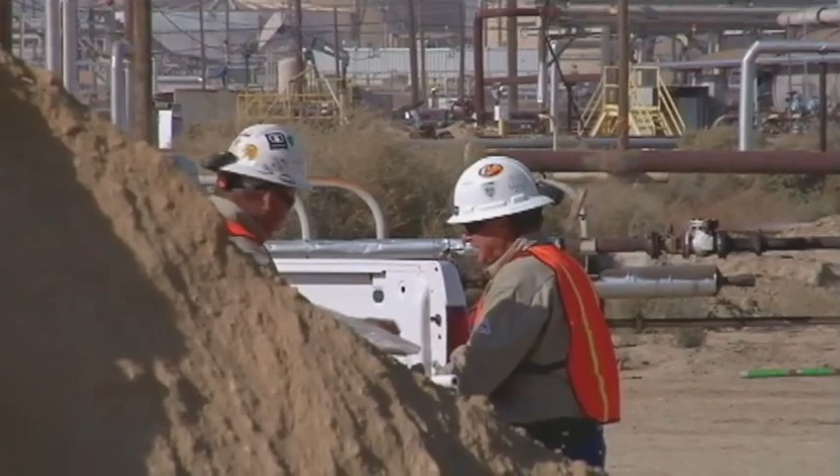Remember, the California oil producers and your company have a strong commitment to safety. We both have the responsibility to provide a safe workplace and to inform you about possible hazards. You, in turn, have the responsibility to know and follow our safety procedures to stop any work that's unsafe and to practice safety every day in every job you do.